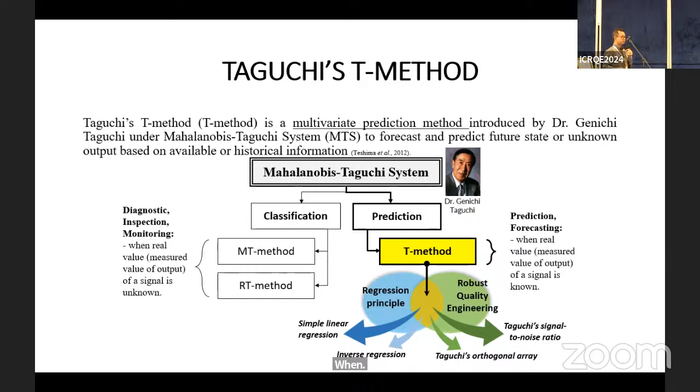For instance, if we have the characteristic of something, the function of the brake system is to stop the car. It's not to immediately stop the car, otherwise the passenger will hit the windscreen. So we want to stop the car when it should stop. So that is the output. That is an example of output that we know. And

How about the new era, where we talk about digitalization? In Japan, we have digital, I forget the term that was mentioned by my colleague yesterday. But in Malaysia, we have Industry4WRD. Industry4WRD is a policy to digitalize our industry, especially the manufacturing industry. So in the new era, people are talking about Industry 4.0. So this morning, I would like to share with you what Industry 4.0 is. So I would like to begin with Industry 1.0.

If you remember, during those days, in Industry 1.0, everything was powered by steam. We had locomotives, and they had to heat up the boiler to power the locomotive. And most factories were using boilers in those days to move the actuators. But when industries invented electrical systems, for example, motors driven by electric power, we started to have localized automation. And we started to be introduced to mass production.

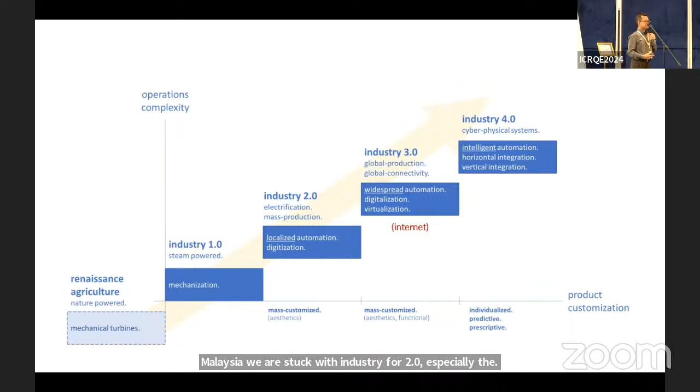But in Industry 2.0, although it is localized automation, some of them are already digitized. So what I want to say here is, if the factory's automation level is localized and not connected to the internet, they are Industry 2.0. In Malaysia, we are stuck with Industry 2.0, especially the small and medium enterprises. But there are multinational companies, especially semiconductor, and also GLCs, government-linked companies. They have good capability in terms of capital. So some of them are already connected to the internet.

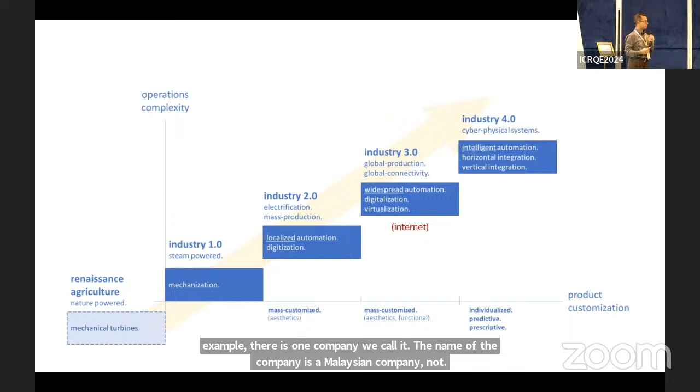But that's Industry 3.0, when we have global production. For example, there are companies in Malaysia where they do the design, the product development in Malaysia, but the manufacturing is in China. For example, there is one company called Schinkel. It's a Malaysian company, not a German company, but they use a German name for marketing purposes, I think. They produce refrigerators for hospitals to keep dead bodies. The design is done in Malaysia, but the manufacturing line is in China. Similar to Apple, Airbus, Boeing, and so on.

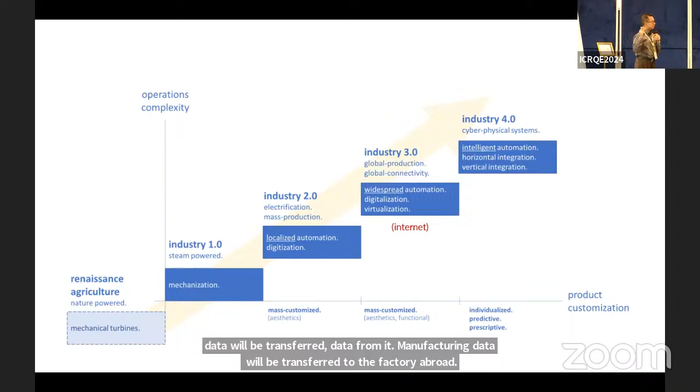Because they have the internet, the CAD/CAM data, computer-aided manufacturing data, will be transferred to the factory abroad. And then the CNC machine and whatever machine will do the process. And because there is a bilateral agreement between China and Malaysia, everything imported from China is tax-free. The limitation here is we do not have the raw material, so we have to import the raw material in US dollars, and that makes the cost higher. So that's Industry 3.0. The big companies can afford that, but not the small and medium enterprises. In our country, around 90% of SMEs contribute to the gross domestic product.

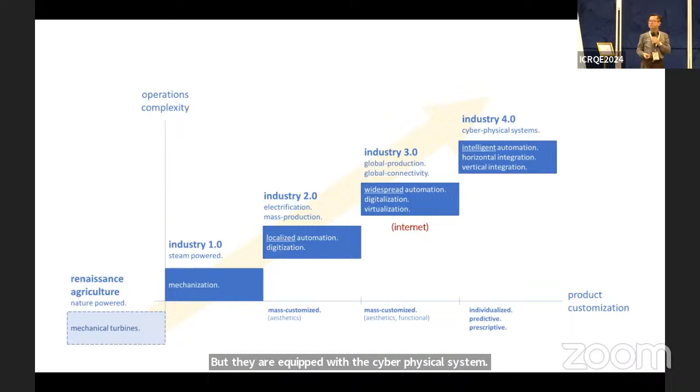Then what is Industry 4.0? Of course, they have the internet, but they are equipped with cyber-physical systems. Cyber-physical systems are artificial intelligence, cloud computing. You can Google what cyber-physical systems are. And with the help of the internet, they have the capability for horizontal and vertical integration. It means machines can communicate. Machines can transfer the data, can continue the process, and the data will be transferred to the cloud, and then the cloud will transfer data to the machine in real time in two-way communication.

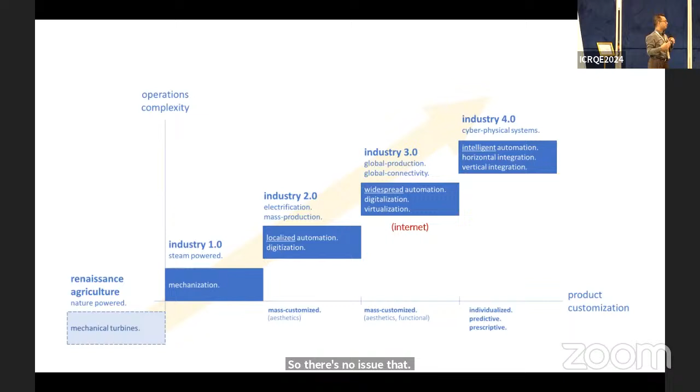They communicate multidimensionally in real time with less human intervention. Humans are still needed, because the human brain is needed to teach the machine. Artificial intelligence will have no capability until humans teach it, because the God-gifted brain is more powerful than artificial intelligence. So there's no issue of humans losing jobs because of artificial intelligence. So that is Industry 4.0.

And, sorry, I think your battery.

But when we keep the data in the server, many data, then it will help us on the descriptive. So with descriptive, we know where and how does it happen. I'm giving example. Our colleague, Teshima-san, he worked with the Japanese government to predict the earthquake. So with the data, what kind of data? The frequency of soil, movement frequency, the weather data, and all data related to the geographical of the area.

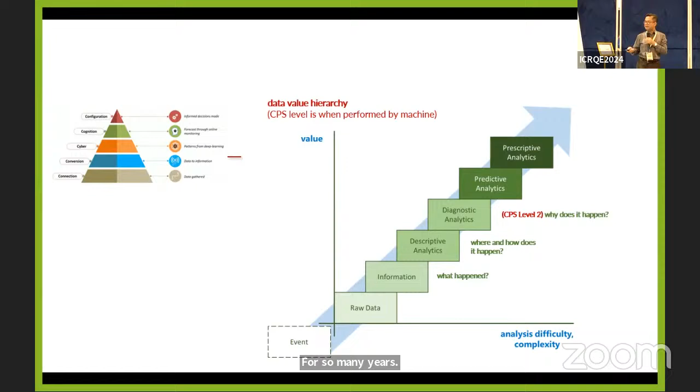So with the data that been collected for so many years, with the descriptive analytics, it will help to tell the government where the earthquake happening and how it's happened because of the soil structure or whatever. And that's CPS, Cyber Physical System level 1. When we have more data and we have better algorithm, it will help us on the diagnostic analytics. With diagnostic, there is CPS level 2.

It will tell us why does it happen, why we have an earthquake, or maybe there's a vibration somewhere else that cause earthquake in the Hokkaido, for example. And then if we go further to the CPS level 3 and level 4, that's predictive analytics. We know what will happen and when it's happened. Oh, the earthquake will going to happen next week or next 2 weeks or next month. So that's the predictive with the artificial intelligence. And we can use the T method as well for this predictive.

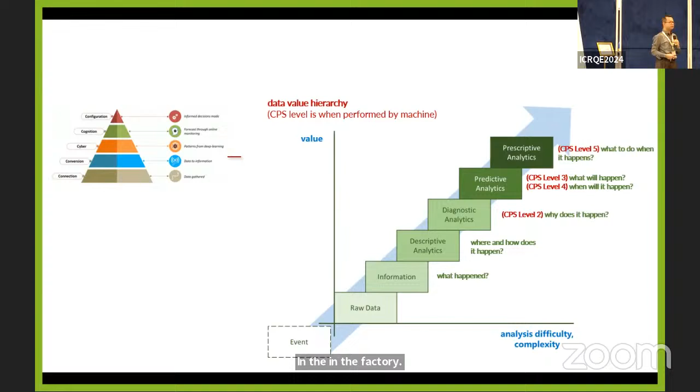And the highest level is CPS level 5, when we know what to do when it's happened. Evacuate the area before earthquake happening. So that's CPS level 5. So if we were to relate with the plant, with the factory, for example, we have pump to give energy to the fluid, to the liquid in the factory. So we can use this for condition monitoring. We put sensor, vibration sensor, for instance, temperature sensor, to measure the variables, the control factor of the pump.

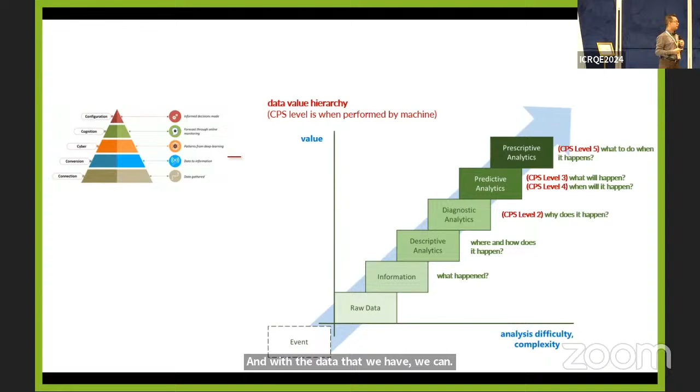And with the data that we have, we can predict when we should do the preventive and corrective maintenance. We know when the bearing is going to wear. So we have to plan for the replacement of the bearing, for example. We can plan because we measure the temperature of the journal bearing, so we know when we should do the oiling, and then plant shutdown and so on. So because we are at CPS level 5, we can use that for condition monitoring as well.

And yesterday, keynote speech given by Engineer Shin Taguchi. If you remember on the IDOV, the first one was Global Voice of Customer and Future Voice of Customer. This is quite crucial for the business, especially whether it is service or product development industry, to know the S-curve of the product development, when it's mature, when people are excited to buy the product. So with prediction using artificial intelligence, we have natural language processing, and the subset of the natural language processing is a sentiment analysis to know what are the sentiment of the customers.

Sentiment analysis will evaluate the emotional tone behind the series of words gained from the attitudes of customer, opinion, emotion expressed by the customer, probably from social media or customer feedback and so on. In Malaysia, we are good on the sentiment analysis for politics especially. The government know whether they are going to lose their election or not. They know what are the sentiment that they can use to attract the voters. What the young voters like, what are the preference of young voters, what are the preference for the middle-aged voters and so on.

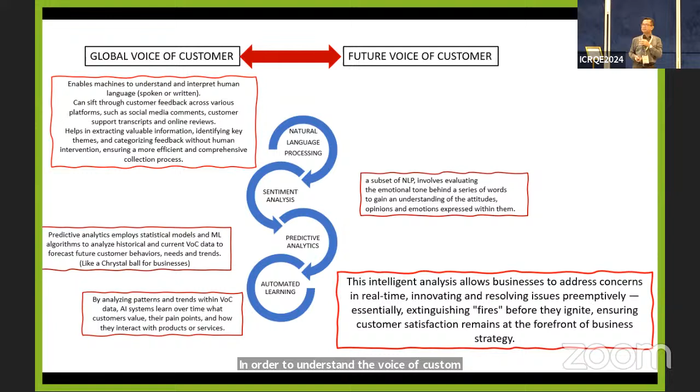NLP enables machines to understand and interpret human spoken or written language, and sift through customer feedback across various platforms: social media, comments, customer support transcripts, online reviews, and so on. And in order to understand the voice of customer, we can also use predictive analytics. What is predictive analytics? It employs statistical models and machine learning algorithms to analyze historic and current voice of customer data to forecast future customer behavior, needs, and trends.

It's like a crystal ball for business. Oh, crystal ball, what is the customer need, the voice of customer for the next 10 years about a car? What is the styling they like? So we can use this predictive analytics. And then in order to understand the voice of customer, there is automated learning.

What is automated learning? By analyzing patterns and trends within voice of customer data, AI systems learn over time the customer values, their pain points, and how they interact with the product or service. So this intelligent analysis allows business to address concerns in real time. In Industry 4.0, the data is transferred to the cloud in real time, in multiple dimensions. So it enables the business to do real-time prediction about their voice of customer. So we don't have to do customer surveys anymore, because we already have this kind of tool.

Okay, so what is the work we are doing in UTM Taguchi Center? I would like to share what our researchers are doing. Zulkifli Marla, I think he presented yesterday. He worked with the binary bat algorithm for the T method. So we use this for prediction, but we try to fuse MTS, Dr. Genichi Taguchi's knowledge with orthogonal array and Mahalanobis distance, with the machine learning algorithm.

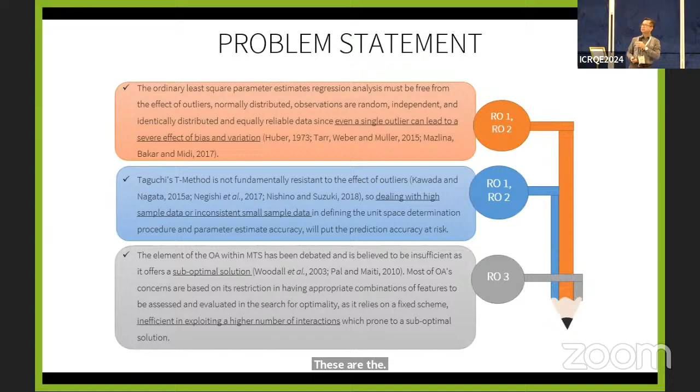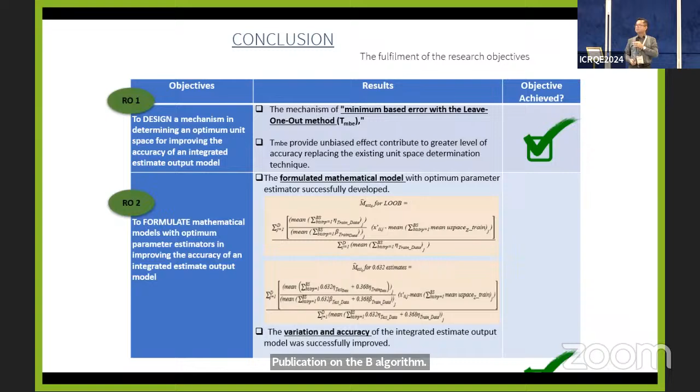And this is work done by Dr. Nolia on the hybrid bootstrap-based algorithm with binary artificial bee colony and particle swarm optimization in the Taguchi method. This is what she's doing. These are the problem statements. And then her objectives: design a mechanism to determine accurate unit space, formulate a mathematical model, develop an architecture for feature selection using hybrid bee and particle swarm, and validate the accuracy of the algorithm. This is about the bee algorithm. There are a lot of publications on the bee algorithm in the journals. And then this is the conclusion. She managed to achieve all the objectives.

From Sundaram Clayton Limited, India. So I'm going to present my project. My project title is Establish and Optimize T6 Heat Treatment Process for High Pressure Die Casting Parts. So before going into my project, I would like to briefly give an introduction about my company.

So our company is Sundaram Clayton Limited. SCL is a major supplier of aluminum die casting components to global automotive players, and SCL seeks to provide a full range of services in aluminum die casting under one roof. We also have a complete range of die casting processes such as HPDC, LPDC, GDC, including machining.

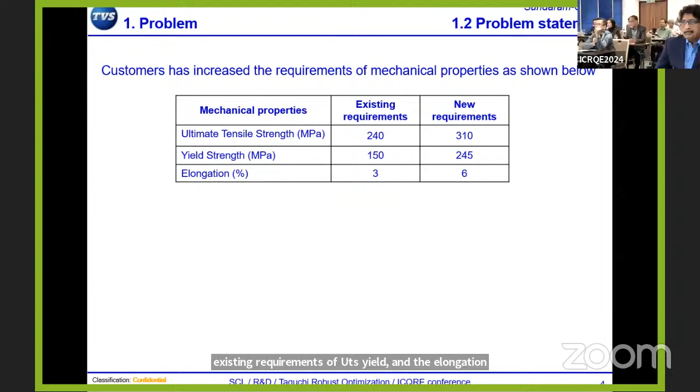So what is the problem statement? Currently, the customer has increased the requirement of mechanical properties as shown in the table. The existing requirements of UTS, yield strength, and elongation are revised as shown in this new requirements column. These existing requirements are feasible with the T5 heat treatment process, but the new requirement is not feasible. So there is a need to go for the next level of heat treatment, that is the T6 heat treatment process. So our problem statement is: unable to meet the new requirements of mechanical properties with the T5 heat treatment process.

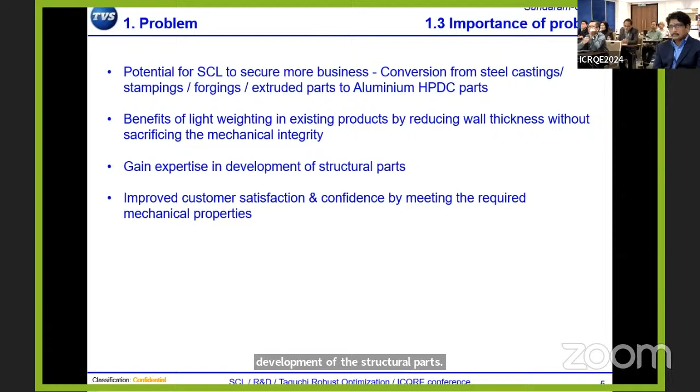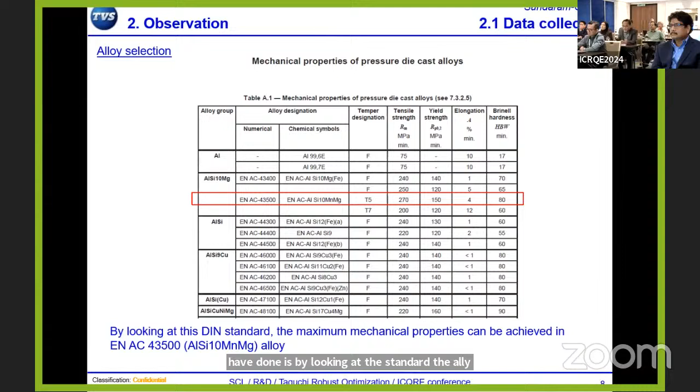So the next phase is the observation phase. Here alloy selection plays a major role. By looking at the DIN standard, the alloy is selected based on higher mechanical properties. The alloy selected is EN AC 43500, that is AlSi10MgMn alloy. At SCL, currently we are manufacturing a component, a structural member connecting the wheel and the suspension. This component already uses this alloy, so we have taken this casting for our analysis.

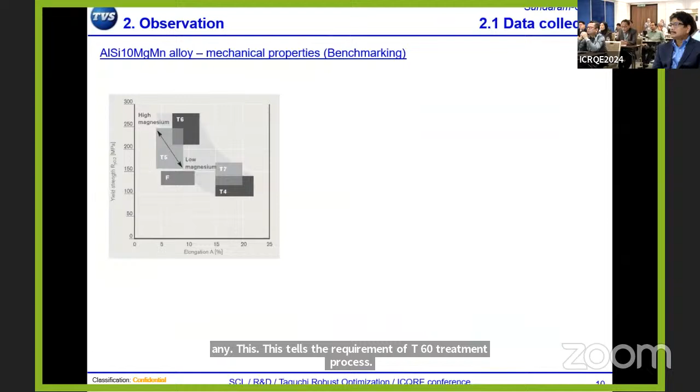So what are the benchmarked values? Through literature survey, you could see the T6 heat treatment process is the one with higher mechanical properties with reasonable elongation. So we have taken this heat treatment process, and these maximum possible values are also benchmarked using this standard.

So what is the challenge in T6 heat treatment process? If you see the process difference between T5 and T6, T5 heat treatment is the one where the castings are heated to lower temperature, say 150 to 200 degrees centigrade, and held for 2-5 hours. Whereas T6 heat treatment process has 3 processes: solutionizing, then quenching, followed by artificial aging.

Solutionizing means the castings will be heated to very high temperature, near to solidus, then quenched immediately in water, then followed by the same process. Because of adding these two processes, when we are heating the casting to higher temperature, as I explained in the problem statement, HPDC castings have more internal porosity. This internal porosity will expand, come to the surface and form blisters.

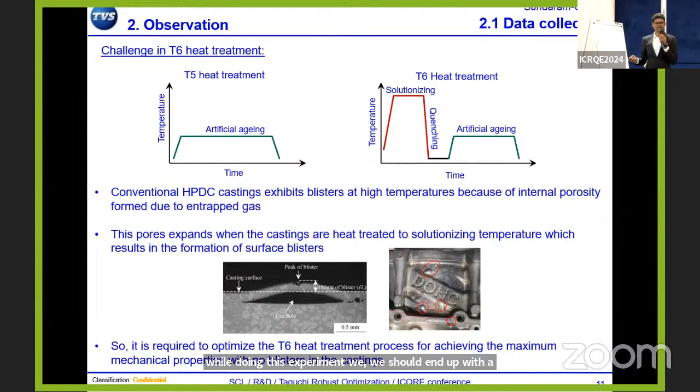You could see this kind of defect will come when we go for T6 heat treatment. So we have to keep in mind that in this experiment we should end up with higher mechanical properties with no blisters in the casting. So we have taken the 8 steps robust optimization using Taguchi method.

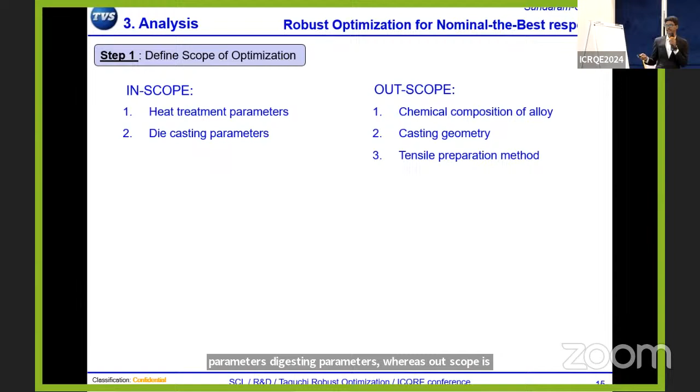Coming to methodology, instead of testing the complete casting, we have taken a cut sample from a casting and performed the heat treatment in a small muffle furnace in a laboratory setup. Step 2 is identifying the ideal function. Based on the literature survey, there is a strong relation between the mechanical properties and the wall thickness of the component, so wall thickness is taken as the input signal.

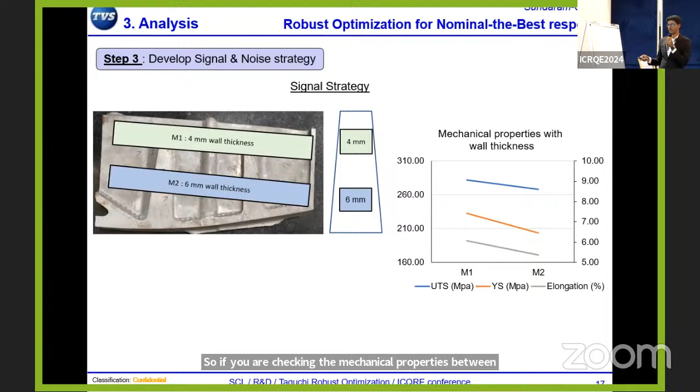In the selected cut sample, there are two regions of wall thickness: 4 mm at the top and 6 mm at the bottom, because of providing draft in the casting. Checking the mechanical properties between these two zones, M2 has lower mechanical properties than M1. So Y is inversely proportional to M.

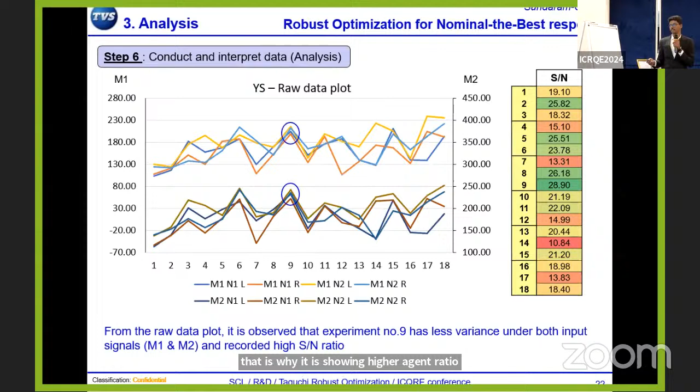The raw data plot is also presented another way. Here you could see the consistency of noise effect. Between N1 and N2, N2 always has higher mechanical properties, and between L and R, the results are inconsistent. Based on the calculation, we also plotted the S/N ratio and mean for yield strength and UTS.

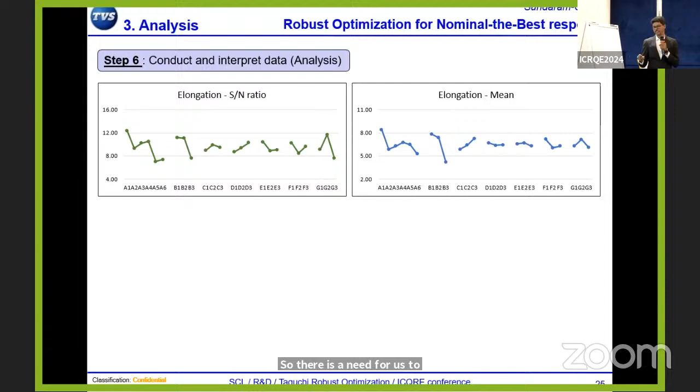So here you could see the optimum parameters are selected based on these graphs. When it comes to elongation plot, the pattern is completely different, opposite to the strength. So there is a need for us to select a different set of parameters for elongation. Totally we have selected 2 parameters: one is for UTS and yield strength, and another one is for elongation.

Based on the optimum parameters, we have conducted the experiments, and prediction and confirmation also done. Between prediction, against 5 dB we could able to get 6 dB, and for yield strength, against 3.7 we could able to get dB of 5.08. So the reproducibility is acceptable.

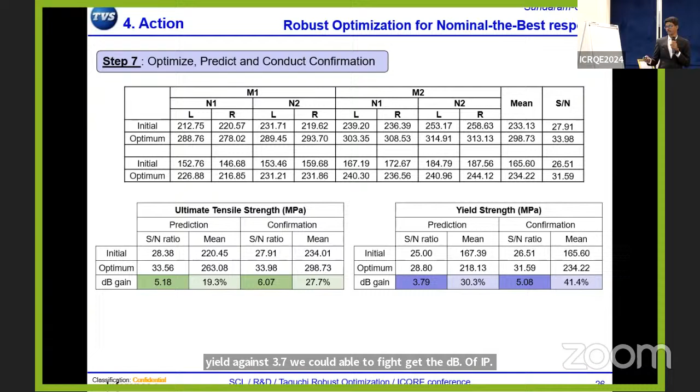The mean is improved by 27%, and here you could see it is improved by 41%. With respect to elongation, these parameters derived from the strength plot already yielded the required elongation values, so we didn't use the elongation optimal parameters. Suppose the requirement is only elongation, then we can go for that second level of parameters.

So what are the benefits? It will give potential for securing more business, especially in conversion from stamping, forging, steel extrusion parts to HPDC castings, and benefits of lightweighting. We can also reduce the product cost substantially. Intangible benefits are customer satisfaction and confidence, and technical knowledge also can be acquired.

One more aspect is the thermal conductivity of the casting can also be increased up to 60%. So it gives almost potential of getting business worth 9 crore per year.

So what are the lessons learned? The most influenced factors affecting the heat treatment process are identified through this robust optimization process. The double NTB method, which is a new method we learned, is an effective method if there is no known relation between the input signal and the response. Noise strategy and preliminary noise study are very important steps for robust optimization.

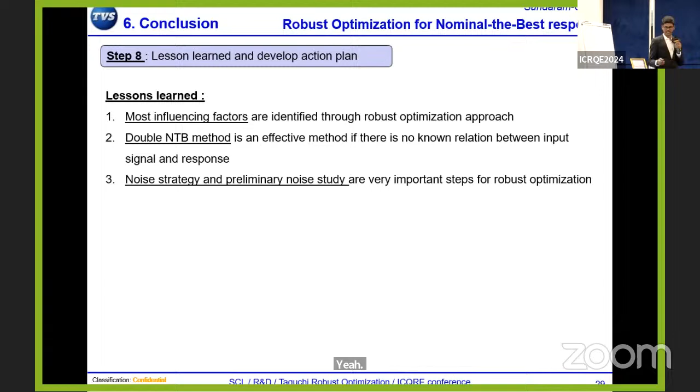So the next steps are: this study can be extended to validate the optimum parameters for the complete casting. To increase the mechanical properties further, we can also use high level vacuum and also cast tensile bar. The distortion on account of casting also we have to validate.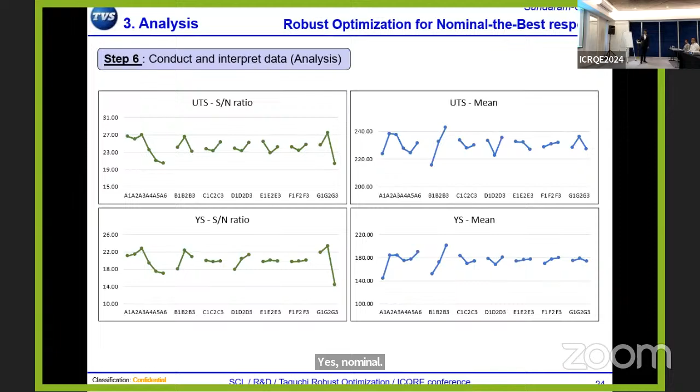NTB means nominal the best, right? Yes, nominal. What is double NTB? So this is NTB within M1 and the NTB within M2. We are calculating basically 2 NTBs between M1 and M2. That is why it is termed as double NTB.

Combining signals. Yes, normally if you see the results, M1 have linear relation with respect to M2, so normally it is linear, but here there is no correlation. So after this study we understand since there is no correlation, we have gone to this double NTB method. Similar to what fluid dynamics? Yes.

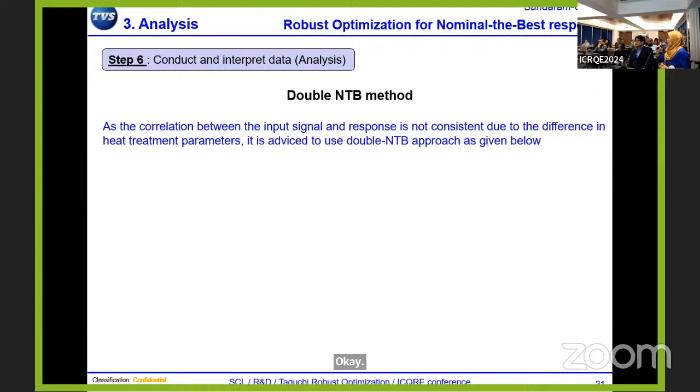See, before the start of this project, we thought that the wall thickness is contributing to strength based on the literature survey. But we are doing different kinds of heat treatment, so the heat treatment process is not constant for all L18. Because of the change in process, the results - what we thought, that casting wall thickness will always improve the mechanical properties - this direct relation is affected. So after this study only we came to know that there is no strong relation between wall thickness and the output response. Okay, because it's a weak relationship. Yes.

So basically, wall thickness contributes to the mechanical properties. If you have less wall thickness in PDC, because of rapid solidification, you get small dendrites. Whereas if you go for high wall thickness, the dendrite size will be somewhat bigger. So the mechanical properties of a component normally depends on the dendrite size, inversely proportional to it. If you have very small dendrites, you get higher mechanical properties. If you have large dendrites, you get lower mechanical properties. The larger dendrite will reduce the strength.

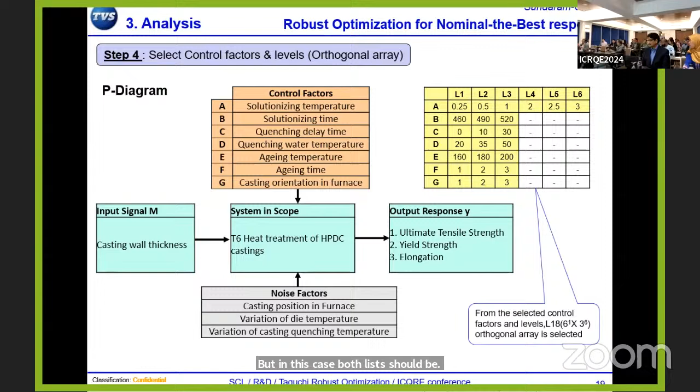Okay, let me make some comment. Can you go to the diagram? Since I coached this project, I feel responsible for the confusion. Wall thickness can be an input signal for the solidification time, right? But in this case, wall thickness should be classified as indicative. Okay, indicative part. Can you go to the raw data part, LAT?

Look at number 9, the very high signal to noise ratio, right? The difference between 4 millimeter and 6 millimeter, 1 and 2, it's not a noise effect. It's not even a signal effect. It's an indicative factor. We know the mean will be different. So in the signal to noise ratio, the effect on the mean, the difference between M1 and M2, is not included in the noise variance.

Noise variance within M1 and noise variance within M2 are averaged, that's the noise variance, because noise variance is within M1 and within M2. The numerator is the mean. So that's how we deal with an indicative factor. Indicative factor means it's not a control factor, it's not a noise factor. We know the difference is there, but the difference is not a noise effect. Therefore, in noise variance, you don't include that.

I see lots of questions. Yeah, okay. So, oh, sorry about that. Yeah, here you go. Where's the... this one. Oh, this one.

Okay, so variance within this plus variance within this is the noise, right? Because there's M1 and M2, the difference between these two is not noise. So signal to noise ratio is overall mean divided by variance within M1 and M2. That's why it's called double nominal best.

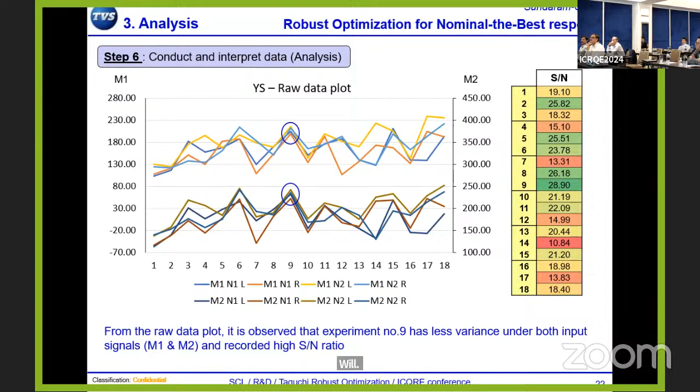I'm sure this project gave lots of good, robust technical knowledge, so I appreciate the hard work. Thank you. It's a physical test, right? No simulation. So it's physical. All right, with that, thank you very much.

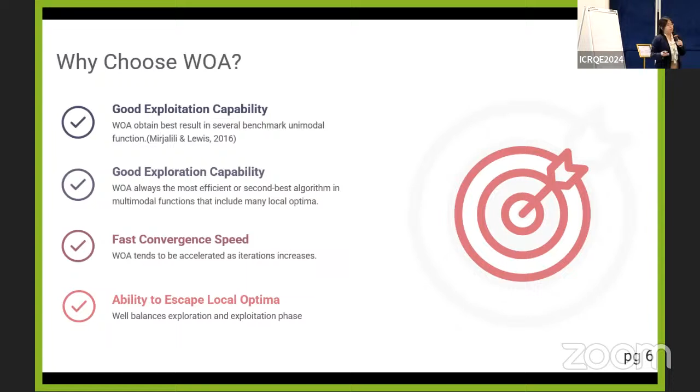And I'm using the BWOA, which is the binary variant of the WOA, because the classic WOA is only for continuous space. So I need the binary parts to make the feature selections.

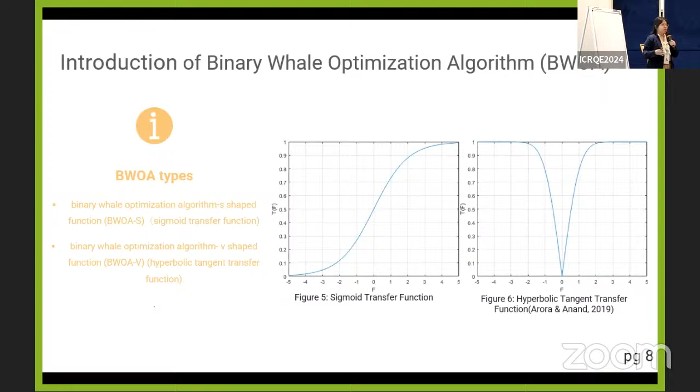There are a few types of BWOA and binary ways: S type, V type, Z type, but I'm using the classic ones, the S and V. They use different mechanisms to transfer to binary. For the traditional one, the MTS is using the OA, so I'm replacing the OA part with my BWOA.

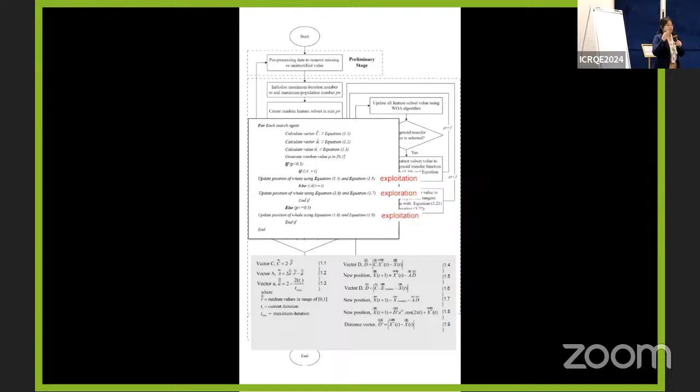In our WOA algorithm, I want to emphasize that when we enter it, it will have a higher exploration rate initially and lower exploitation rate. Then as the iteration passes, the exploration rate will be lower and the exploitation rate will be higher. After this, we get a table with decimal points, but that is not our result because we want it in feature selection.

So we need the binary parts, which is sigmoid and hyperbolic tangent transfer function, to convert it into either sigmoid, the S shape, or V shape, depending on what we're selecting. After that, it will convert back into binary values again.

And then when the iteration is finished, since I'm having 50 iterations, when all 50 iterations are finished, we will collect the best result of the feature selection. But that is not the end yet.

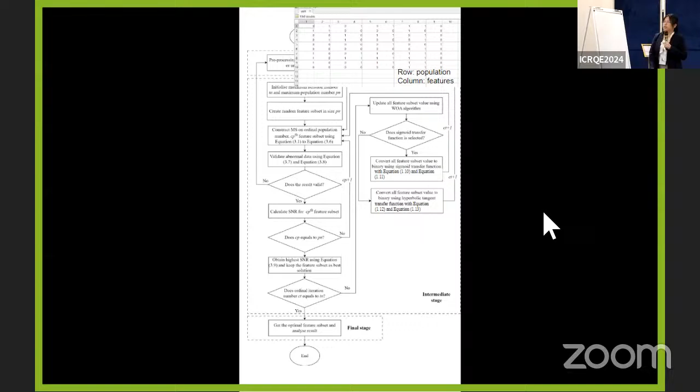After that, we will run the MTS BWOA for 30 times. This is a number we selected, but it depends on what we need. Maybe you need a longer time to prove it, or a smaller time because you think the result is good enough. But for me, I'm using 30 times to run.

If the feature selected exceeds half of the experimental runs, then it means that these features are good enough and will be selected. If it is less, then it will be eliminated.

This is one of my results from the benchmark dataset, the breast cancer Wisconsin. So I'm getting the MTS BWOA S and V selecting features 2, 6, and 8, like I explained how it selects before.

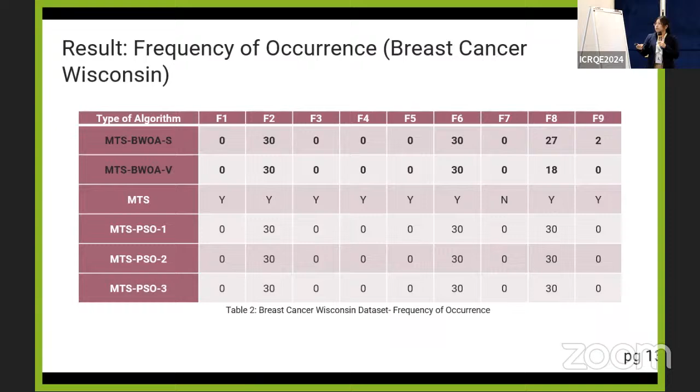We can see over here that the MTS BWOA S and V has a higher feature reduction rate than MTS. Although it is the same as MTS PSO, I'd like to say that BWOA has an advantage over PSO because PSO has two variables each time it updates the positions, but WOA only uses one, so it uses less memory space. Also, BWOA has a higher exploration rate than the PSO part.

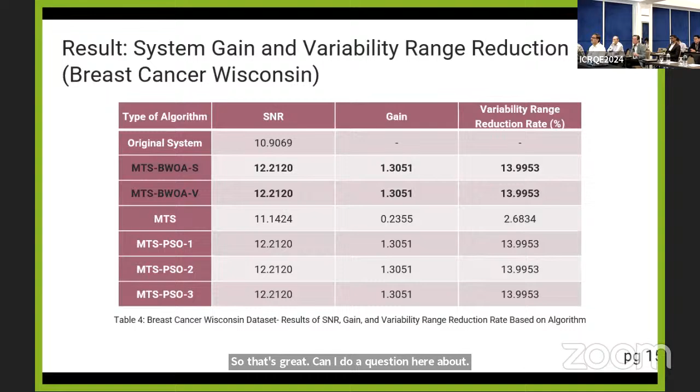I have one question or comment. So, thank you for the presentation. I think it's great that at the end of the day, you want to maximize the discrimination. I do have a question here. Can you define feature reduction rate? What is that? Okay, this is the features reduced divided by the total features. The features are the variables, the MTS variables. So how much you reduce the number of variables? So the more variables you take out, the higher the rate of reduction.

Right. So is this better? Are you saying smaller is better or larger is better? It's smaller the better, because having smaller features we are enhancing. It seems like whatever the reduction rate, as long as it maximizes the discrimination, that's a good system, right? Okay, I have to think about it. Thank you. The goal should be to improve the accuracy of prediction. Maybe I wish to say something more, because this time I'm using the SNR as my objective function. But if you want to use the accuracy, it's also one of the options.

Any other question from the floor? If not, then thank you, Ms. Wong, for your presentation. Right, I would like to call upon our third presenters, Mr. Shah Mudassar Abdul Sattar, Mr. Sharat Singhania, and Mr. D. Dinesh Kumar, with their presentation titled Robust Optimization to Eliminate Handlebar Juddering in Scooter Vehicle Using Taguchi Methods. Please welcome.

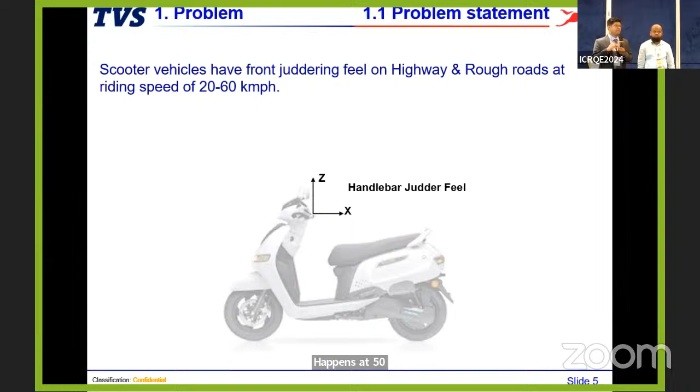So coming back to the problem, in scooter vehicles in general we have juddering feel, which we are calling a rhythmic oscillation of about 15 to 30 hertz. It happens at 50-60 kmph usually. So this happens on a plain road when a rider goes on a flat road with small disturbance.

The road input energy basically reaches a natural frequency of the overall system, and it creates a rhythmic oscillation at the handlebar, which is felt by an expert rider, and especially by those who ride quite often in the company, as a problem. It is a function of basically modal frequency, which is vehicle geometry, structural stiffness and other subsystem property dependent.

Yeah, maybe next slide. So from our internal observation, I'll just try to point. When we have taken some objective measurements in the factory, we found that this vibration feel is in the range of 4 to 6, compared to the target of 8 out of 10. And even the handlebar acceleration PSD plot showed that we are considerably higher in terms of accelerations compared to the target and competitors.

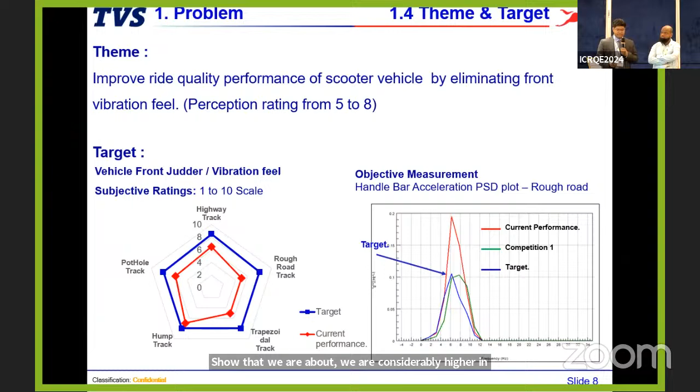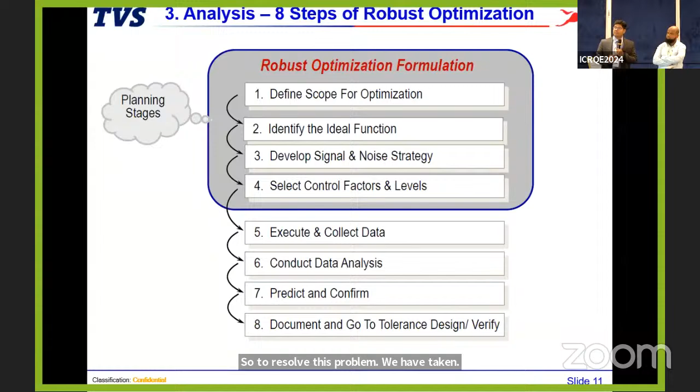And in scooter front ride comfort problems, we observed that about 60% of problems are because of juddering feel and harsh feel. So to resolve this problem, we have taken 8 steps of robust optimization. I'll be taking you through each step in the coming slides.

So first, we have defined the scope and ideal function for solving the problem. In scope, we have taken the chassis subsystems, including suspension, tire, frame, and toggle link stiffnesses. Out of scope is seat, wheels, road surfaces, vehicle speed, and engine. So basically, we try to solve this problem irrespective of engine, because our colleagues in other teams are anyway working to resolve engine vibration related transmissibility to the handlebar. We are trying to complement with the chassis systems.

And we have the input signal as road disturbances, and the output is reduced energy, basically the difference between the road energy and the handlebar energy. We have taken front and rear suspension stiffnesses and damping as control factors, and frame and toggle link structural stiffnesses, toggle link stiffness, and tire stiffness and damping. And variations in these control factors we have taken as the noise factors.

We have conducted input signal studies because we also wanted to capture which road conditions create this problem and what is the input energy from the road. Out of that, we selected these three inputs. So these are the final load conditions we arrived at: it happens around 50 kmph, especially on highways with patches, and we have taken Belgian pave also as a dynamic system response study, and these various load conditions for the study.

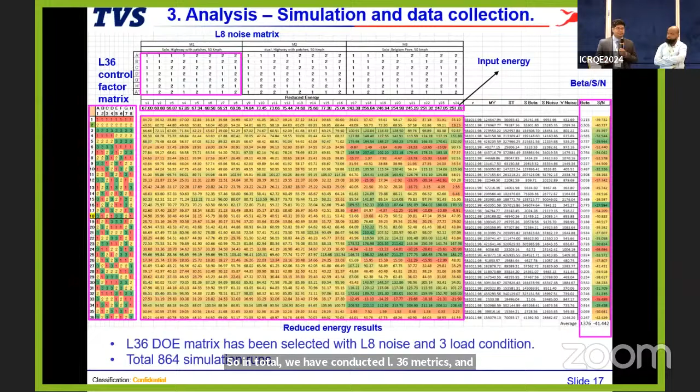So in total, we have conducted an L36 DOE matrix and 864 simulation runs. And we found that there are 2 critical parameters which could provide the solution, basically front suspension stiffness and tire stiffnesses. We could gain about 16 dB during the prediction, and we could confirm about 14.64, a significant variability reduction, which we could capture during the verification phase, with a 30% drop in the handlebar acceleration.

So in conclusion, a 14.64 dB gain was confirmed, and we could increase the energy absorption by 150%. And we found 2 critical parameters from this study, because this problem is more subjectively felt, and there are so many parameters involved, contributing to this. We could converge to 2 critical parameters, which was a good result. And we have implemented this in a recent NPD project. And we are looking forward to implementing this simulation methodology in all our new products, especially for scooter type vehicles.

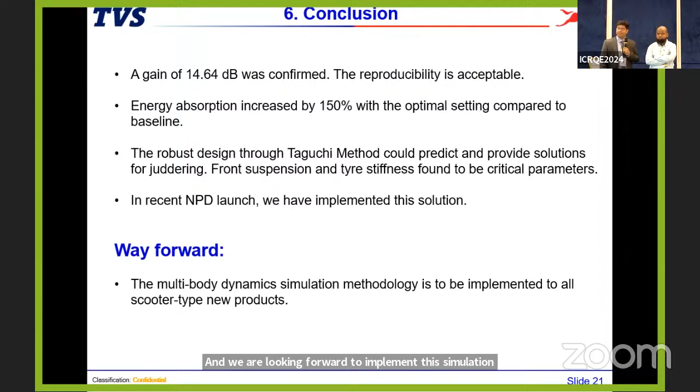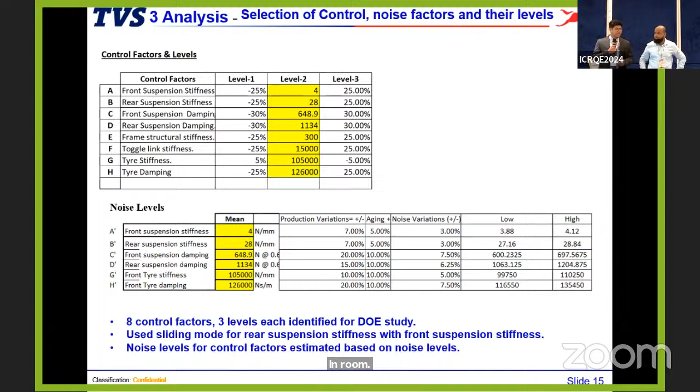Can I spot the noise factor you show in the slide diagram? Okay, sorry. Signal, this one? Noise level? Noise factor, right? Okay, P diagram. Why didn't you include the road surface as your noise factor? Because I wonder if the different type of road surface will affect the problem as well.

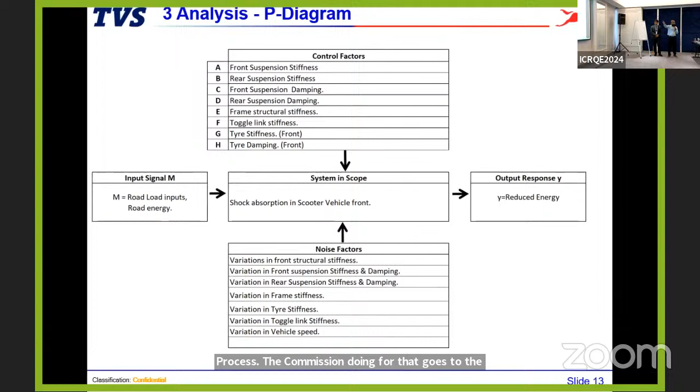Yeah, this whole project was done as part of simulation, where the vehicle was not there, but we built the multi-body dynamics and we did the simulation. In that simulation, we have taken input signals at different road conditions. So the input itself was given at the different road conditions, and that road condition is not the noise; it's an input, because it's an indicative factor for the energy going into the system. If the road condition is very bad, the energy that goes into the vehicle is high, versus if the road is very flat, the energy that goes to the vehicle is low. So these were considered as an input itself. So as input, we have given multiple signals to this system.

And since we did this as a simulation, the variation in the control factors is considered as the noise factor, because there are no environmental conditions or other factors we can put in the simulation. Yeah, but in real practice, I believe the road condition should be the noise factor, because we don't want the handle to judder at whatever road condition.

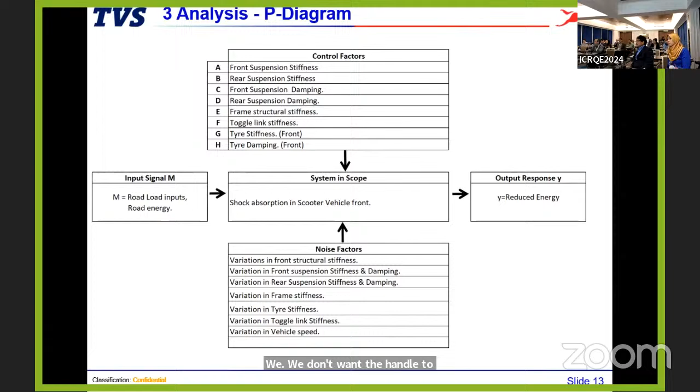Yeah. So if you go back to our slide, there are three road conditions we have considered: the plain, highway with patches, and Belgian paving. Belgian paving is more of a rough surface, and there are payloads like solo, dual, maybe 1% city, 2% city. We made this matrix, and overall there are 12 conditions of the road including the payloads. Out of that, we have selected these three conditions, and we have run the simulation for these. So road conditions are already considered as the input of energy to the system.

Load condition as well, because depending on load condition, the force from the load is different. The function is to absorb that energy so that it doesn't transfer through the hardware to the driver. So it's an input signal. And because of the simulation, variability of control factors is the best way to induce effective noise, because the simulation itself doesn't have any noise factor in it. It's a 1D simulation, right? And you did this sliding level.

Good morning again. We'll be discussing robust optimization of scooter engine combustion and conversion system functionality. So I will skip it, the introduction is already done. Only one piece of information I want to add: we have various engine capacities, from 100 cc to 310 cc products.

This research work is particular to one scooter engine. See, generally the ICE engine, internal combustion engine, takes air-fuel mixture inside and combustion happens, and the products are exhausted waste gases. The ideal is complete combustion, so CO2 and H2O will come out, but there are limitations in a heat engine, so some incomplete combustion happens. So hydrocarbon (HC), carbon monoxide (CO), nitrogen oxides (NOx), and methane also may go out into the environment.

So the government puts a lot of restriction in terms of regulations. This graph indicates how the Indian government's Bharat Stage standard has gone from BS3 to BS4 to BS6. We did not go into BS5; our government has taken a stand to go directly from BS4 to BS6. So the norms are stringent: 80% reduction is demanded from the previous standard.

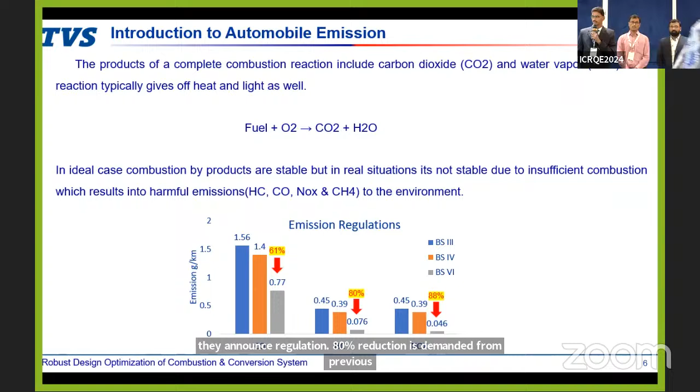So with this background, our work is on two areas: one is combustion, another one is conversion. Combustion takes intake air and fuel, fuel is injected through this intake manifold, combustion happens, and the gases are exhausted. Then the exhaust gas goes to treatment, the three-way catalytic converter, where the incombustible gases are converted into harmless gases. So our work involves both areas. Naturally, this reduced pollution will help society and enhance human life.

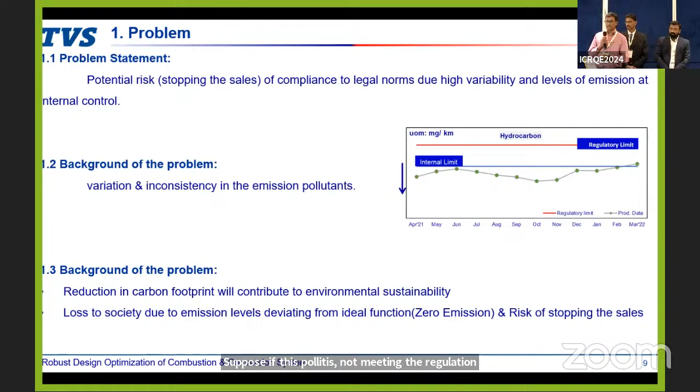Our production vehicles are picked up. This is our production sample data. Here we could see we are going closer to the internal regulation limit. We noticed this problem and took it up through a robust optimization project, tracing all the pollutants. If these pollutants do not meet the regulation limits, we have a potential risk of stoppage of production and sales loss, and it also has an environmental impact.

Then we have taken a target to reduce emissions by 20% from the current level. This is the step methodology we followed for robust optimization using Taguchi methods. We'll go one by one. This is the scope for the combustion system. In scope are engine, fuel, and induction system, and from the software side, the electronic control unit, ECU. Under this scope, we selected the parts: the intake pipe and the engine control unit, ECU.

Out of scope is other than the engine system, like the transmission and exhaust system. Under the conversion system, the exhaust system is in scope. Under the exhaust system, we have a muffler and catalytic converter, with its noble metal ratio. This is the muffler, and here is where the catalytic converter is placed. Engine-out emissions pass over the catalytic converter, which converts the harmful gases into stable products that are safer for the environment.

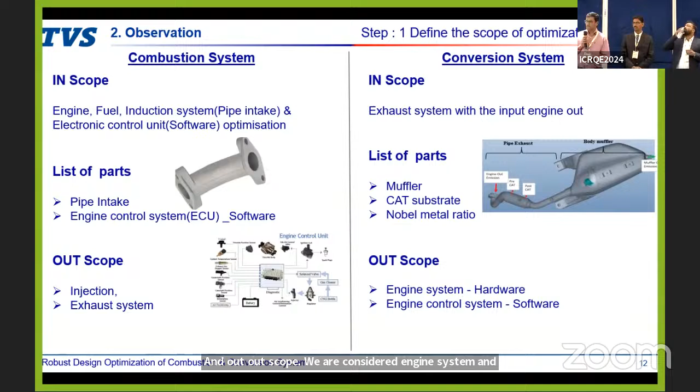This is the body muffler; it reduces the sound of the engine. Out of scope we have considered the engine system and software, the engine ECU control systems. This is the ideal function under the combustion system: combustion is the transformation of chemical energy into mechanical energy efficiently. If the conversion happens efficiently, we should have lower emissions. But it is an ideal condition; complete combustion is not possible, hence we have emissions.

Here I want to specify one thing. When the engine is in cold condition, it has higher friction. To overcome the friction, the engine develops a lot of emissions, so in cold condition, emission levels will be higher. In hot condition, there is a chance that nitric oxide will be higher. Hence, we need to focus on cold emissions as well as hot emissions.

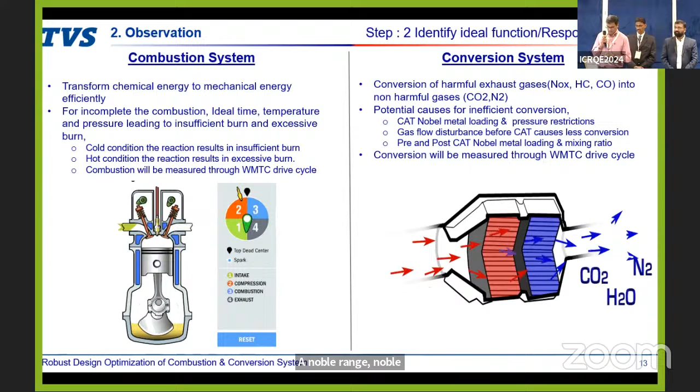Coming to the conversion system, conversion is the conversion of harmful gases to non-harmful, stable combustion gases. Here, the main potential causes for the emissions are noble metal loading and gas flow restrictions. Here is the intake system in which the injector is mounted. The injector placement also plays a critical role, and the spark plug initiates the spark for combustion.

Then once combustion has happened, the combustion gases pass through the catalytic converter. There, harmful gases will be converted into pollution-free gases. This is what we mentioned here. Injector position is important, and catalytic converter noble metal loading is important for emission control.

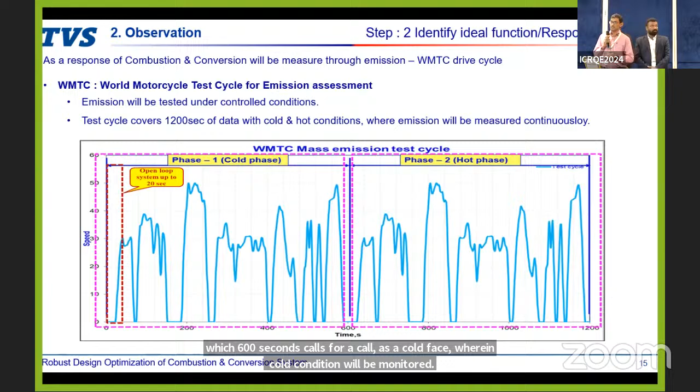This is how we measure the emissions in our laboratory. This is a WMTC cycle which we are using for emission measurement. This consists of 1200 seconds testing time, in which 600 seconds is called the cold phase, wherein cold condition emissions will be monitored. Later, the 600 seconds is called the hot phase, where hot condition emissions will be monitored. Both are important for emission control.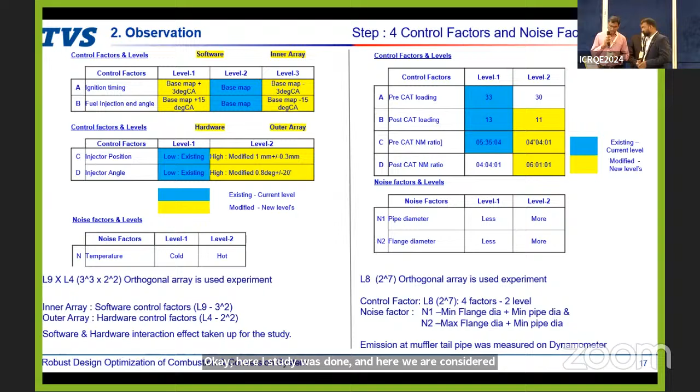And noise strategy, the noise factor is here. We have done a preliminary noise study considering the pipe diameter and flange diameter. Here we have considered the minimum noise condition and the maximum noise condition. We have taken these inputs for further experimentation.

Next, from here we arrived at the combustion and conversion arrays. We used inner and outer arrays for the combustion system, where we are going to study the software versus hardware interaction effect. For conversion we used hardware with respect to variation of noise. For combustion we used L9, for conversion we used the L8 table.

We did the main effect analysis for the combustion system. With the modified level of A, B and C factors, it resulted in 2.5 dB gain, where from the best level we reached 2.1. Similarly for conversion we did the main effect analysis, where the modified level of A, B, and C gave a result of 0.67 dB gain, and the remaining were maintained at the existing level.

In a similar way we analyzed the mean effect also in the combustion system. We were able to see the impact on the mean as well as on the SN ratio, where we analyzed the software and hardware, which gave a significant result for mean effect also, like 89 milligram reduced in combustion for NMHC, and NOx 63 milligram reduced, dB gain of 1.9.

Coming to the conversion system as tailpipe, we are able to see a 3 milligram reduction in the mean effect. It's the effect including the combustion system. Similarly NOx also shows a 1 milligram reduction. For the dB gain of NOx we are not seeing a margin. It's only a marginal increase.

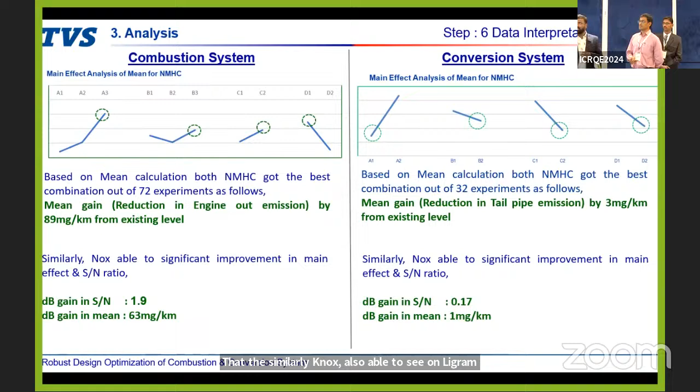From here we did the confirmation trial. With respect to the confirmation trial, the prediction was 2.1, and our confirmation trial gave a dB gain of 1.2. As a mean also we have seen 89 milligram to 42 milligram in combustion. Similarly in conversion, we are able to see the mean effect was 3 milligram to 2 milligram, and the dB gain from 0.67 to 0.4, a marginal increase.

From the action points we updated, both in software and hardware, what we changed we updated in the revised drawing as well as the supplier check sheet. With this result, we are able to see our factor of safety improved by 50%, where earlier we were operating at 80% from the regulatory norms, and we moved to 50% with a very good margin with respect to regulatory norms.

From phase 1 as combustion, we achieved a 10% reduction in tailpipe emissions. With phase 2 as conversion, we achieved 8%. Cumulatively, we reduced tailpipe converted emissions by 18%, a significant contribution with respect to regulatory norms, with 50% factor of safety improved. With this optimization, we were also able to save on noble metal loading cost, saving almost 90 rupees per vehicle.

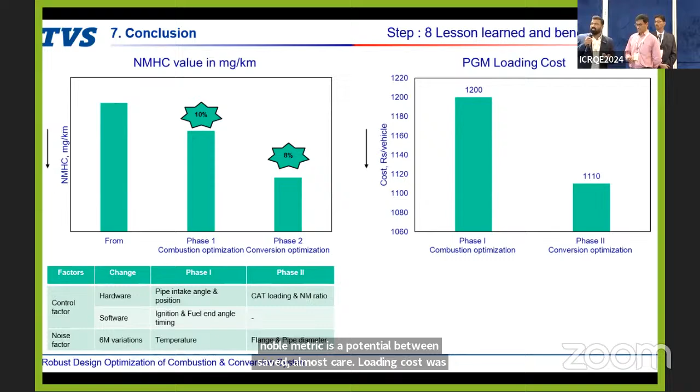Next, as a lesson learned, I want to summarize. Again, the vehicle cost reduced by 90 rupees per vehicle, and the overall savings per annum was 16.2 lakhs. The potential is that we updated our learning into our upcoming scooter models.

Our tangible learning was understanding the complete functionality of the system, combustion and conversion. The key learning was studying the software versus hardware interaction, which resulted in optimizing NOx and NMHC without side effects. We saw no performance drop in mileage or drivability. As indicated, tailpipe emissions were reduced by 18%, and we are operating at 50% factor of safety from regulatory norms, which will have a big impact and business benefits.

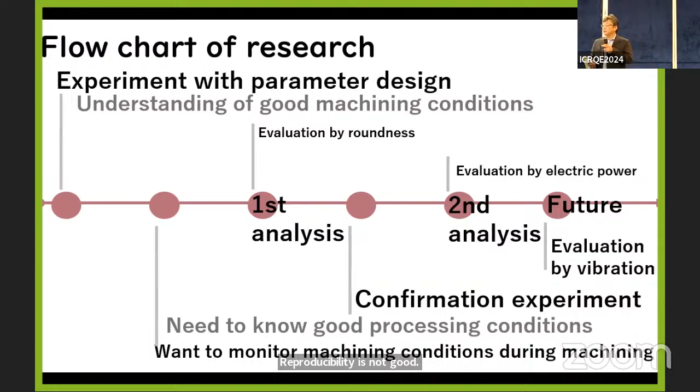So the difficulty in measurement of the grinding process is that the cut timing is not defined. The grain cutting process involves both deformation and cutting. And the main spindle has high speed rotation, so it's difficult to measure the power data.

So this is a control factor. Almost all the control factor is the machining condition, cutting condition. The levels are not disclosed as required by the company. Okay, this is the indicative factor - the inside diameter, the difference of the inside diameter, and the tool rigidity.

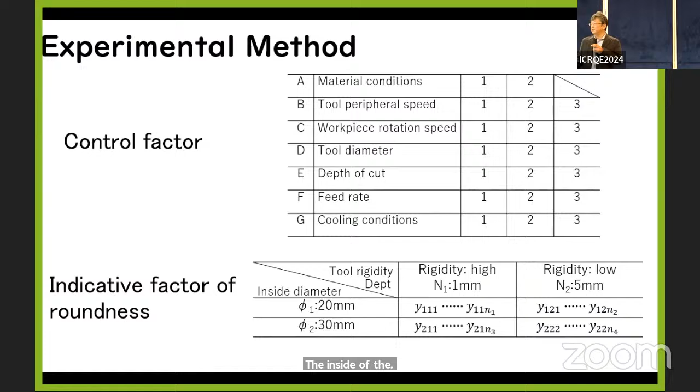Okay, so we measure - the first analysis is the roundness. Roundness measuring is done in the circle of the full rotation, and opening the data, the horizontal axis is the rotation angle, and the vertical axis is the amplitude. Okay, next step, so define the center.

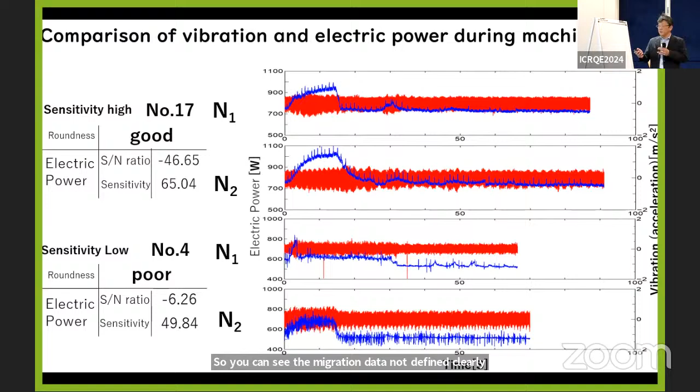Based on the results, a comparison was made with the vibration waveform, which was energy data acquired at the same time. This is a comparison of the vibration data and the electric power data. The high sensitivity is L17 condition, and L4 is the poor condition. You can see the vibration data doesn't clearly define the difference of the condition, but the electric power data, you can find the difference.

So for the same conditions, L17 and L4, the roundness clearly shows that difference.

This presentation covered experiments planned based on the research background and conducted using parameter design techniques. Roundness and electric power evaluation were evaluated. The result of the SN ratios for the roundness and power evaluations did not confirm exact additivity of the effects. However, trends were matched for sensitivity, and approximate absolute values matched for the electric power evaluation.

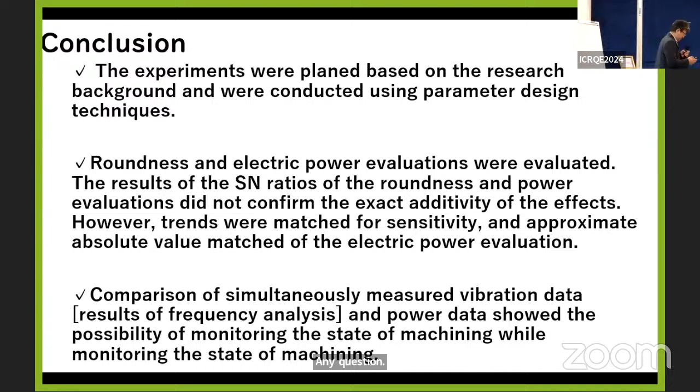So roundness, you said the roundness data. Roundness. Nominal, so nominal is the best. Yes, it is nominal. So isn't that the distance of the center through rotation?

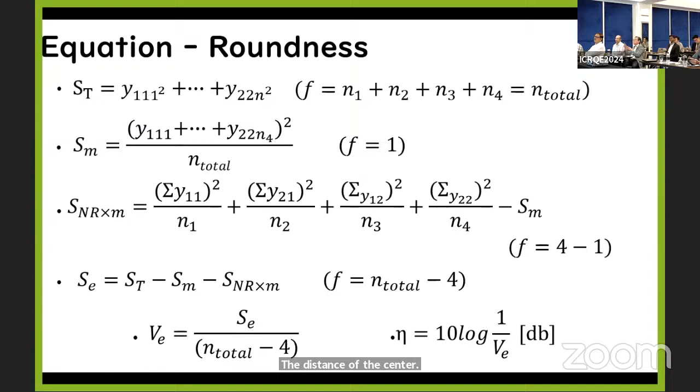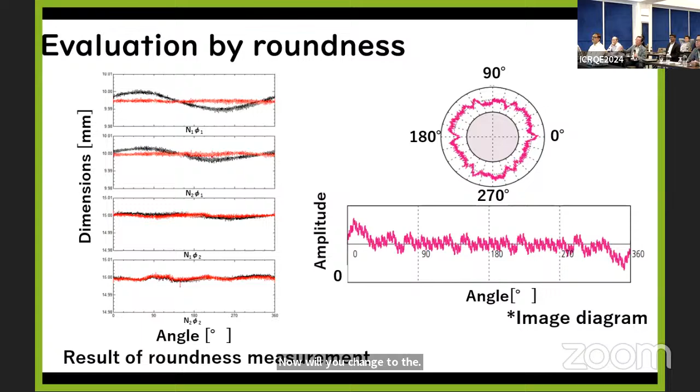This approach is very compound. So just the sensitivity is good. We need more consideration and more analysis is needed. But this is a finishing process, so the measurement is very difficult.

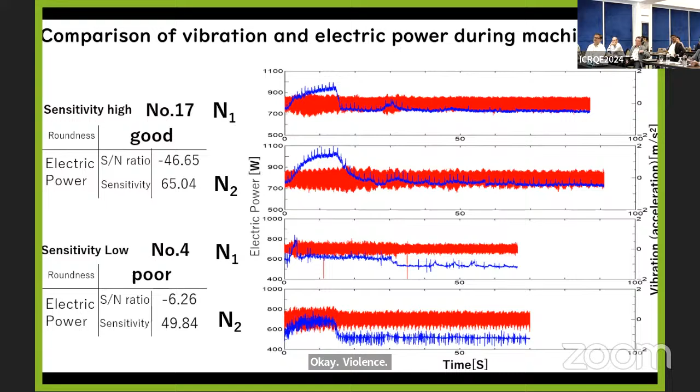So we consider maybe the equipment error, the measurement equipment error is included in this data. Power data has all the machine influence - so panel vibration, chassis vibration, and spindle vibration - all this influence is included in the power data. So that is why clearly measurement could not be shown in this data, so we think.